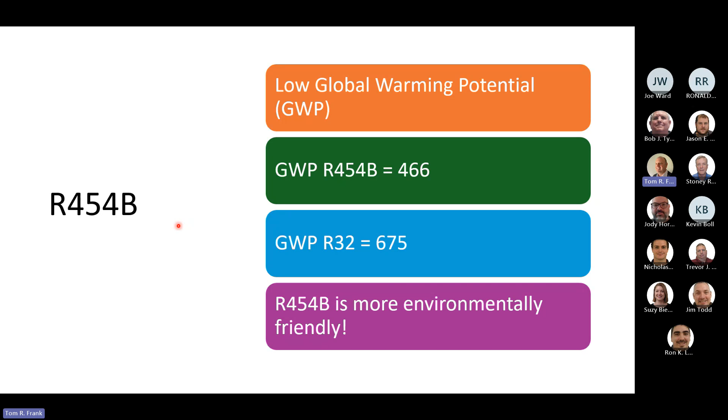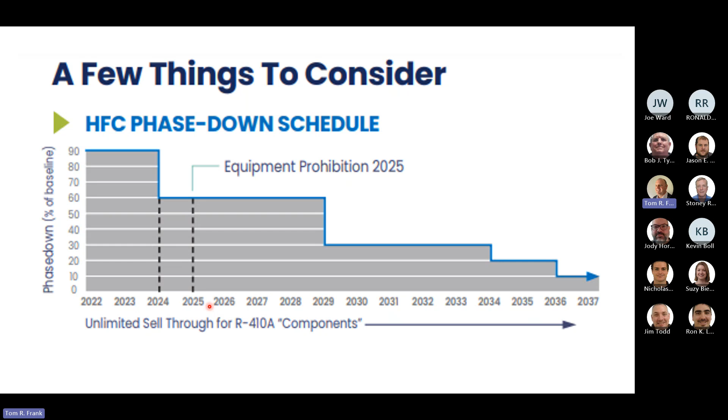We'll talk about the sell-through periods here, but long and short of it is the refrigerant itself, 410A, will be available long into the future, but manufacturers have to stop making stuff that uses it and move to lower GWP refrigerants moving forward.

Sell-through, which is different than in the past and important to understand. If you were to chunk up the products that we sell today into 3 different categories, one is as a product, meaning it's completely sealed, delivered from the factory, assembled. Best way to think of that would be residential package units, commercial rooftops, window air conditioners, refrigerators.

Those products actually have a 3-year sell-through period, meaning, once this year is over, 2024, if you can find them in the marketplace and they're available through distribution, you can install those types of products with 410A for 3 years.

A system, which is very common in our marketplace, you could think of as a system that is built of components, an outdoor unit, coil, air handler. You're assembling it in the field, if you will. There is only a 1-year sell-through after this year.

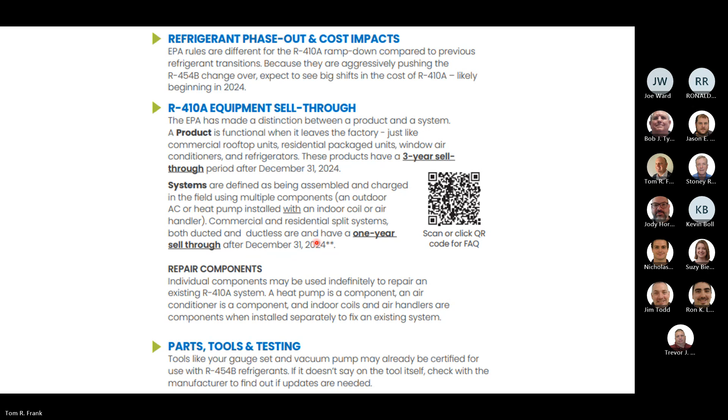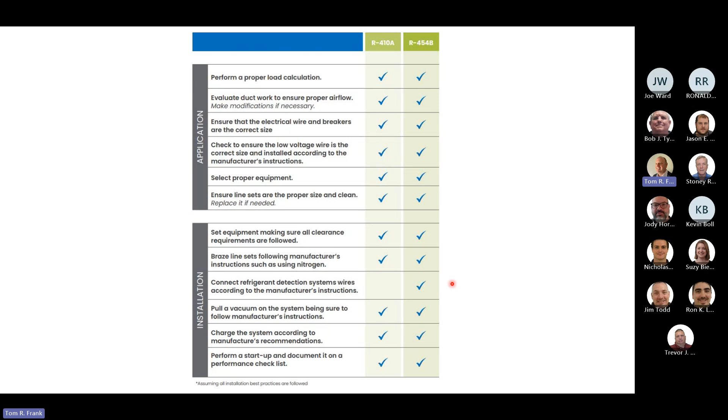Pressures, temperatures, glides are all very similar. The installation time to install one versus another isn't really any different. Brazing really isn't any different. In fact, you might start moving to refrigerant press moving forward. But nothing really different there, nothing to be wildly afraid of.

So with all the manufacturers, you're going to hear lots of different terms. We're calling this a refrigerant detector sensor or a control. These are the devices that actually sense if a leak should ever occur in the system and how the system should act afterwards.

Allied has taken an approach to transition to these new refrigerants by having some product that may come shipped as 410A, but is actually field convertible to R454B. And to do that, you might need some extra accessories initially until the product becomes completely dedicated to these new refrigerants later down the timeline.

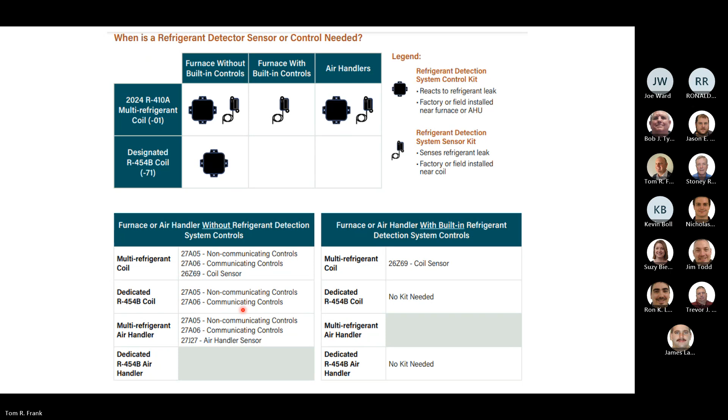We placed our last order for 410A quite some time ago, back in June, if I remember correctly. But they started shipping these multi-refrigerant coils back in May. Air handlers started to ship back in June. These sensors and controls, we've already taken some inventory of. We actually have some inventory now of 13 and 14 SEER2 air conditioners in the new refrigerant. We're starting to order some of these new ones, and then you can see we're really right on that cusp of things getting very interesting very quick.

Later down the timeline, you'll see the furnaces. Not a major change there other than the control board. You'll still have the same models. We'll go over that transition there.

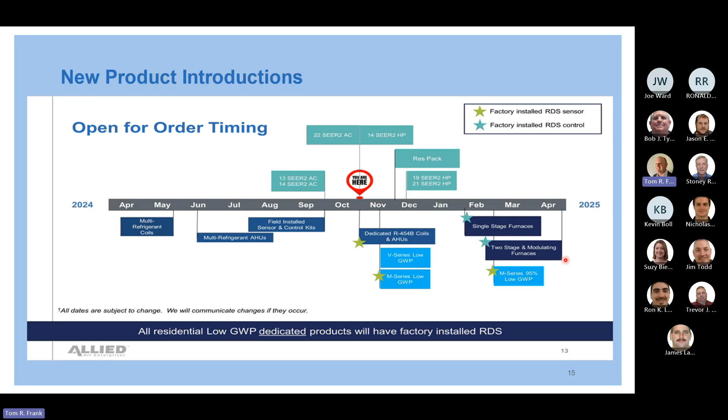Know that internally here at APR, we have some great resources for our teammates to understand old models to new models. There are product roadmaps available through the manufacturer. This actually helps us to keep an eye on and a layer of accountability within the company, that we're acting as one team to basically make sure that we have adequate.

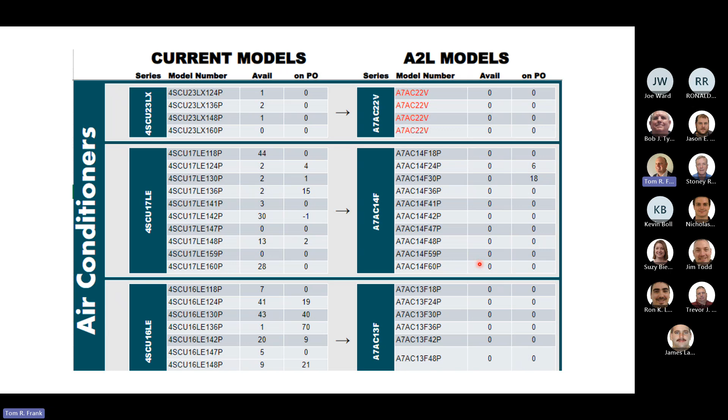So stocking strategy, last orders for 410A were already placed. The goal was basically to have enough product to get us past the timeline that we were just looking at of transition for each product, plus a buffer, about 6 weeks. Maybe a little bit more than that. But if you've been working with a manufacturer for any length of time, I most certainly have, you know that sometimes you got to take the timeline that they tell you and add a solid month or two or maybe a quarter onto that. They're holding very close to their timeline, which is good, but we put about a 6-week buffer on there.

Our flagship brands, AirEase and Armstrong, our goal is really to not delay that transition. Of course, we have to be very careful about how much excess 410A we bring in so we don't get stuck with it. So our goal there is really to transition to 454 as it becomes available.

Concord, which is our value line of Allied products, the goal there is really to not just transition there, but actually to have extra inventory, be last distributor standing, if you will, in air conditioners and heat pumps, entry level, and their match components. Our goal is to have enough to hopefully get us in those products to June of 2025. So, if you're a contractor and you're hanging on to it for dear life, you just do not want to transition to the new refrigerants, we should have adequate supply of Concord brand equipment to get us really till what we think is June. It could change, but I think we got that planned out pretty good.

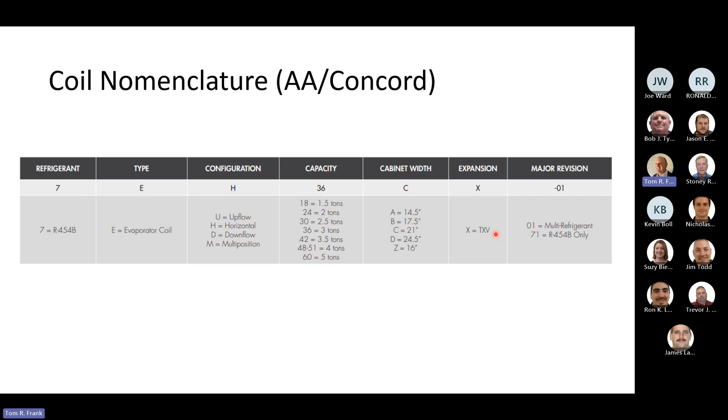But 7 is the indicator in the Allied world that the unit is at least shipped for or compatible with 454B. You will see in the coils upflow, horizontal, downflow, multi-position, various tonnages, widths, and then really everything moving forward is an expansion valve. So if you were hoping and keeping your fingers crossed that pistons would somehow stay in the world of HVAC, think again, it is really moving all to TXV at this point.

This is a picture of our product roadmap, which is available as a PDF from Allied. Happy to get anyone copies that they would like, that shows the old coils to the new. Takeaways here, really looking at this, is everything that existed before will exist in the future. There's not an incredible amount of change here. The two ones that are just worth pointing out might be the horizontal coils are going to be factory installed TXV, where they were field installed in the past.

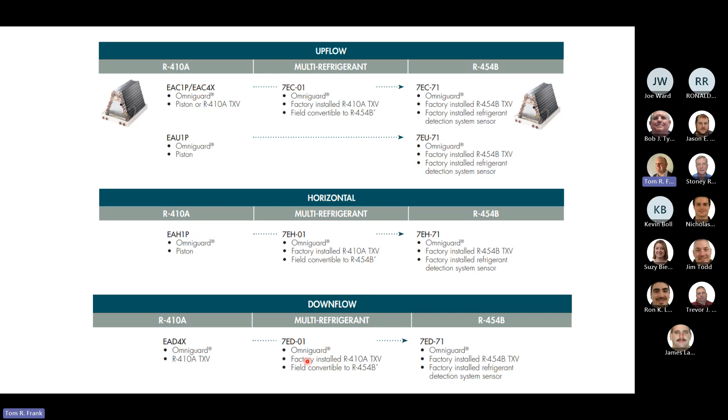Okay, and you can see here this -01 to -71, that's the currently shipping flex coils, if you will, and then eventually they will become dedicated to 454B and downflow coils as well. Multi-position coil, you're probably wondering, is that in the future? There hasn't been any major announcement to that, but I suspect that is a product we will see again.

Air handlers, nomenclature review here, starts with a 7. Same story there, 454B. You will see some -01s versus -71s. Electric furnaces will still be available. We do have some air handlers that are 2-piece in design. If you're not familiar with that, they used to be the BCE 7 series, but they will now be the 7AH2s, and that 1 versus a 2 is 2-piece versus single-piece.

Good product. They will be available in PSC, constant torque ECM, and variable speed ECM. Nice option, still having PSC available. Not every manufacturer does that. Some have gone exclusively to ECMs. And then we've got our capacities, voltages, TXVs as standard. And then most will be 24 volt, but some that we sell more than I knew. I was told that after the last presentation.

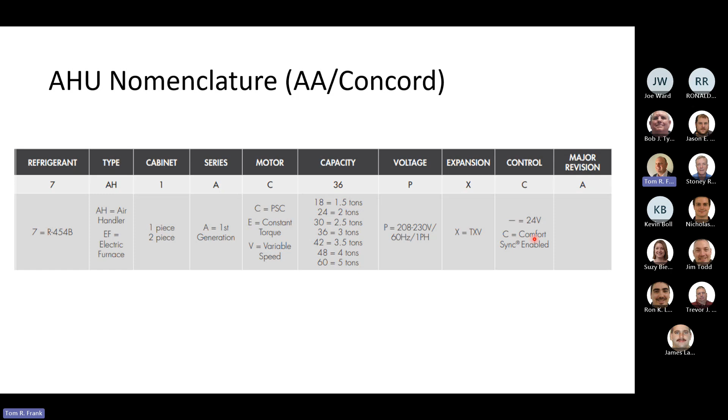But we do have some that are what they call Comfort Sync enabled, and they're very good, usually on the higher efficiency systems. They are compatible with the A2 or A3 communicating control. So if you are somebody that likes the idea of a communicating system, plug and play, we do have some air handlers that are Comfort Sync enabled. They can be 24 volt, but they have the ability to be part of a communicating system.

If we're looking at the air handler roadmap, here's a very simple snapshot. Here are all the BCE 5 series that are a very strong part of the product family. You can see the bridge here, if you will, with the -01s. We're currently stocking, selling these, inventorying them. And then as time marches forward, they will be dedicated 454B models with the control already factory installed and the sensor already factory installed. Okay, for now, if you are really itching to install a new 454B product, you would need the kits to make that happen and a TXV.

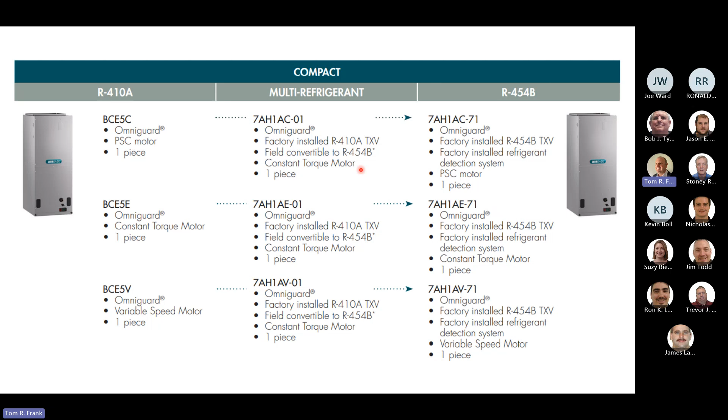Just quickly here, this slide's not correct. It does say constant torque motor on this C model. That's just a typo. It's still available as PSC. These are the two-piece models that you would know as the BCE 7s. Don't confuse that 7 with 454B. That's old nomenclature. But you would see the new models here as you go forward. One is available as a bridge in the constant torque ECM. The communicating capable unit here will only be available as the current BCE 7S or as the new 7AH2 model. That's a typo there too. This will be an AV. Disregard that.

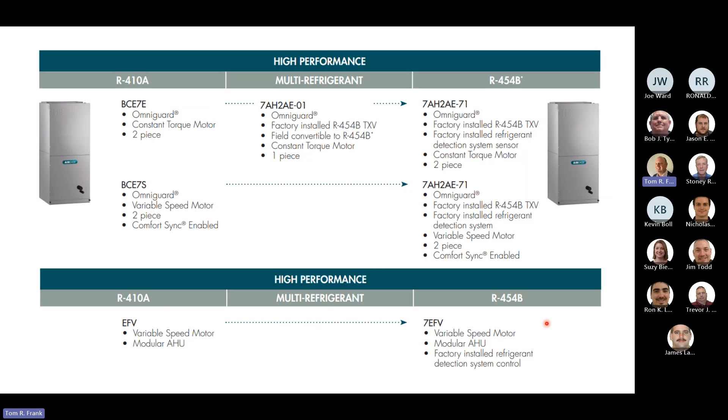And then the electric furnace or the modular air handler. There's a picture of it. You can think of that as the top section of an air handler. We do stock that. That's nice for attic installations where space is an issue. They come in various widths, just like the coils. Good to know that will continue to exist in the family. Not on this slide, but are the apartment style air handlers, the BWCs. They will also transition to the new refrigerants.

Outdoor units, air conditioner and heat pump nomenclature. If you are a flagship brand, you will see the A here for AirEase. You will see the 7 for the change in refrigerant, air conditioner versus heat pump. We will have some product that is cold climate heat pump capable, which is nice and is a factor when you get into certain markets and utility rebates, tax credits, things like that. A true solid, strong performing heat pump, which will be a welcome addition to the family.

You will see change in nomenclature. The old nomenclature, which is confusing for many, 16, 17, 18, 22, that all really was geared around what efficiency could you get up to. And the feedback from the contractors as they went through this change was that people felt like they were being sold equipment that was above the minimum efficiencies many times. So love it or hate that strategy. The new strategy will be base level stuff. The nomenclature will reflect the minimum efficiency, and then the higher end product, like the inverters, will have more of an up to strategy in that nomenclature.

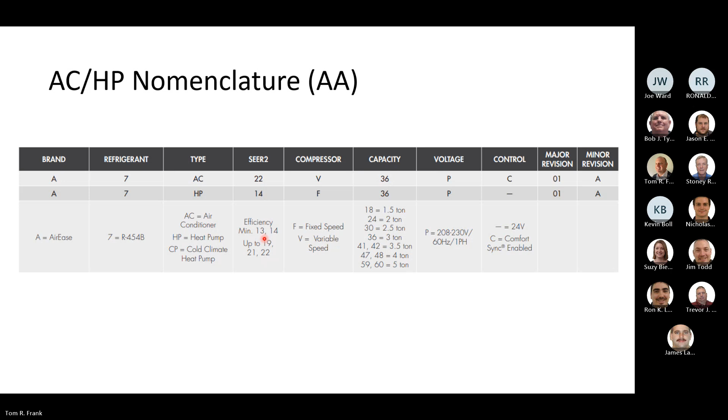This is the product roadmap, just to kind of take a peek. This is looking at 410A versus 454B. This is AirEase flagship brand. The 23 SEER will be a 22 in the new refrigerant, very similar type of a product. The 18 that we know as the Lynx in the Concord world, but as the 18 in the AirEase world, will be available as a 19 SEER, little upgrade in efficiency.

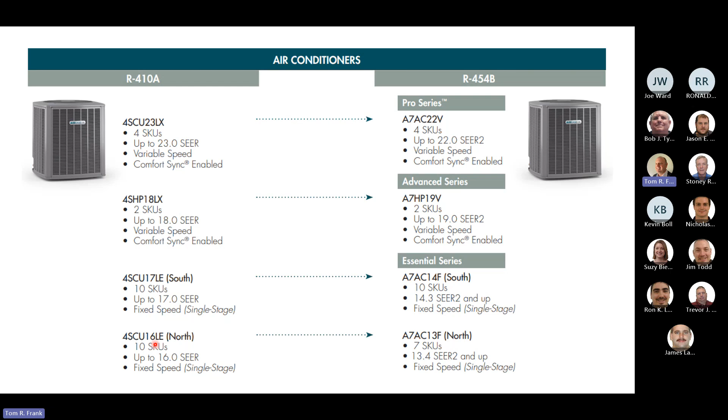The 17, which is our minimum threshold in the South or Delaware for us and Maryland, will now be the A7 AC14. So you can see that change there, going from a 17 to a 14. And then the 16, which is the minimum efficiency in the North, will now go to a 13.

Heat pumps, very similar. You know, if it existed before, it exists now. This is where you'll see the upgrade to the new modulating heat pump that will actually be cold climate capable. Some differences in the cabinet, which we'll show here in a few minutes. Some really nice upgrades actually to that cabinet. But if you saw it before, you'll see it again.

And here's where you'll see that entry level series or essential series, they're calling it, where you see the nomenclature change to that minimum threshold of 14 here. Don't worry, nothing really changed. You can just see the strategy. This was up to 17 SEER versus 14.3 SEER2 and up. So just getting with the new times, the new SEER2 ratings, getting modern.

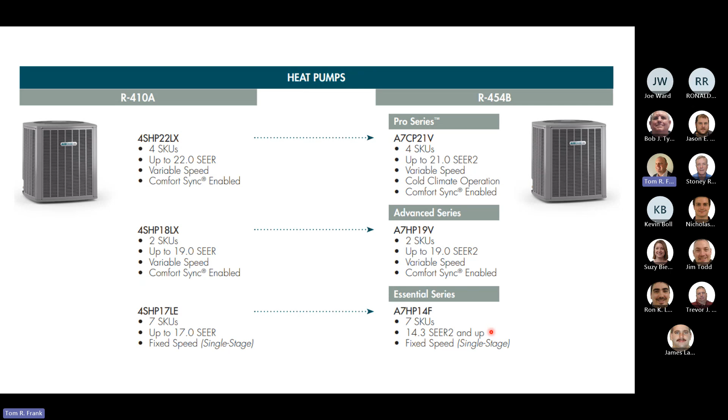Concord, very, very similar, which is the value line. The air handlers that we went over, just so you're aware, if you didn't know this before, the air handlers are actually the same nomenclature, whether they are AirEase or Concord. So they're the same SKU, same strategy, nothing changed there.

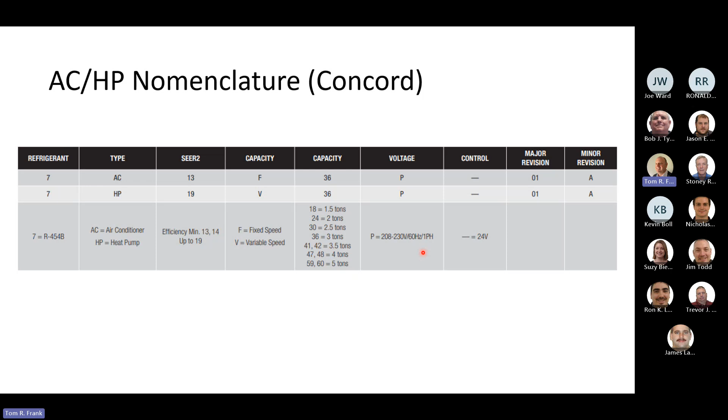The Concord outdoor models, here you go again, you got the 7, that's a 454B, AC versus heat pump, minimum efficiencies versus up to efficiencies, fixed speed, single stage, and then we've got, of course, a very nice offering of variable speed product, even in Concord. The tonnages and controls. Really everything in the Concord world is 24V, no communicating offerings there. Skinnier lineup than AirEase, but you get the idea here.

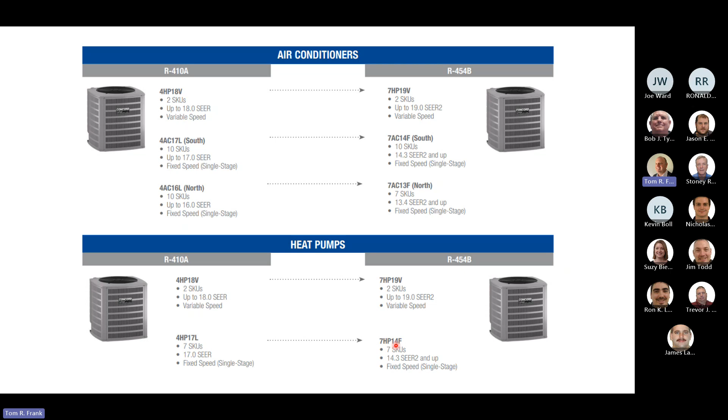You've got modulating product. This is actually a heat pump, but they do list it in the air conditioner family as well. You get the heat for free, that's what I tell people. And then you've got your single stage product air conditioners, the 17s to the 14s, the 16s to the 13s. And then on the heat pumps, you'll see the change over there, just model nomenclature change. No major new additions, just model number upgrades and refrigerant upgrades.

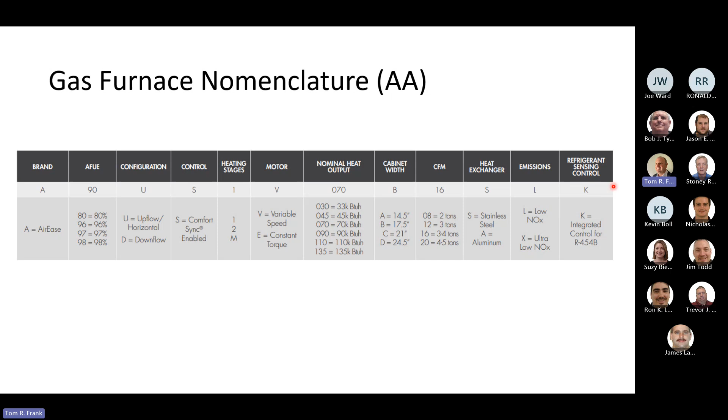Gas furnaces, don't need to dwell on this too much. There's really not any major change. The major takeaway here on the nomenclature is that the new models, as they become available in 2025, will have a K at the end. And that just means that that control, or the ability for the sensor to integrate into the furnace control, will already be built into that furnace.

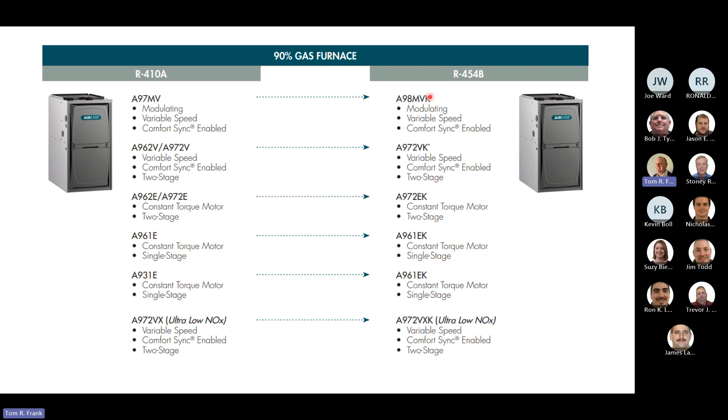No major changes, no major surprises there. A really, really strong furnace offering. With AirEase, the only thing you see here is the K. That's the major change there. Same thing for the 80%ers.

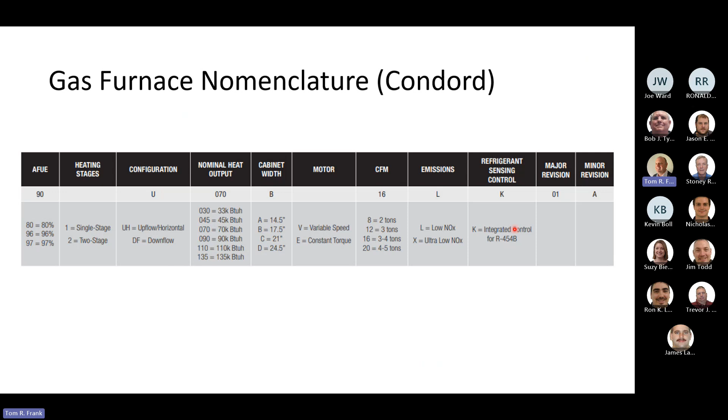Concord, I spelled it wrong, Concord. It's Concord. Same thing there. There'll be a K at the end as those become available. Don't sweat that yet. That's really a 2025 thing. Again, still great product offerings here in Concord.

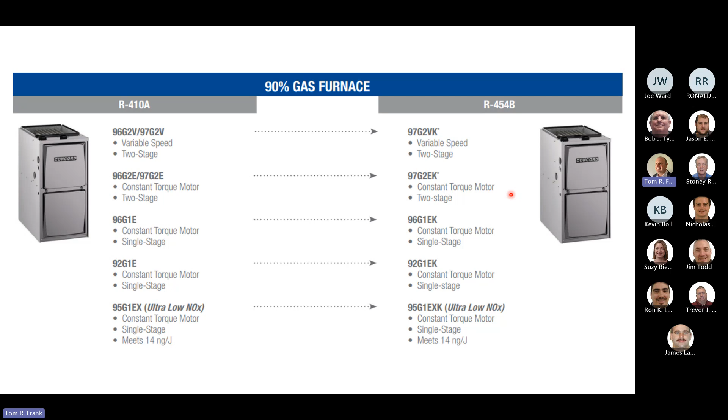We have probably more tax credit qualifying furnaces than any other brands in the marketplace. We've got the modulatings, of course, 98% in the AirEase, 2 different 97%ers in the AirEase. We've got 2 different 97%ers in the Concord. Very strong, great product going into the heating season. Good to know. It's a $600 federal tax credit, and there are quite a few utility rebates that would add onto that as well.

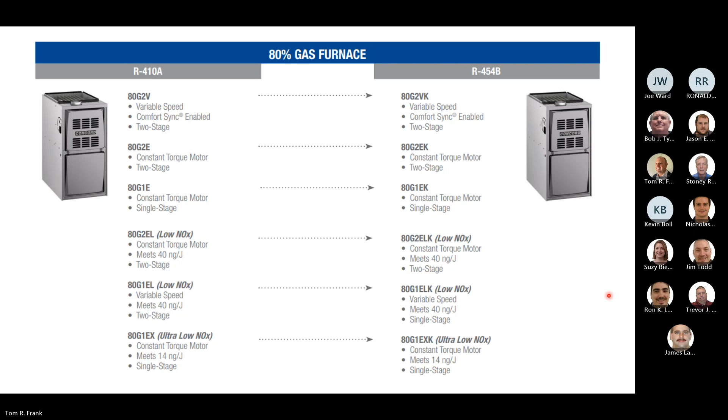And the good news with that is most of these electric heat packs today, not only can they be used in the new air handlers and they'll fit in just fine, but they can also be used backwards. They are backwards compatible. The only exception to that is going to be the electric heat kit for what we knew as the BCE 7S. That is the communicating capable variable speed 2-piece air handler. That one is very specific. That's the only one that is a little tricky, where the 7S requires that old heat kit, and the new variable speed communicating capable air handler, not even available yet, will require its own separate electric heat pack.

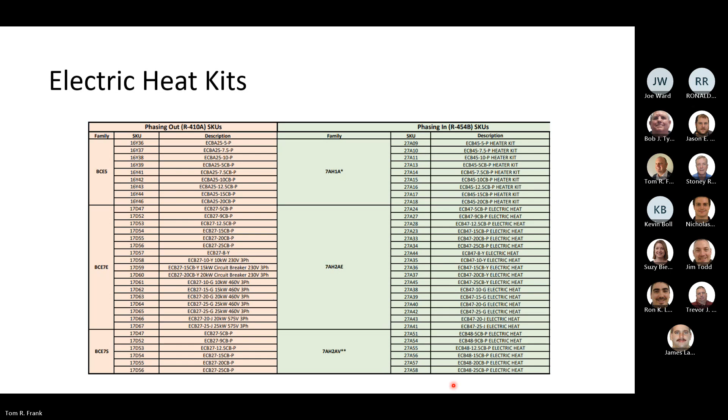So takeaways quickly on the electric heats are the ECB 45s, those are the new ones. They are backwards compatible with the old BCE 5. So they will work in the new 7AH1s. They will work in the old BCE 5s. Very simple. The ECB 47s are now backwards compatible with the old BCE 7Es. So another one with backwards compatibility. The only one that's really tricky is that BCE 7S and that new communicating capable. They require specific kits, so be careful.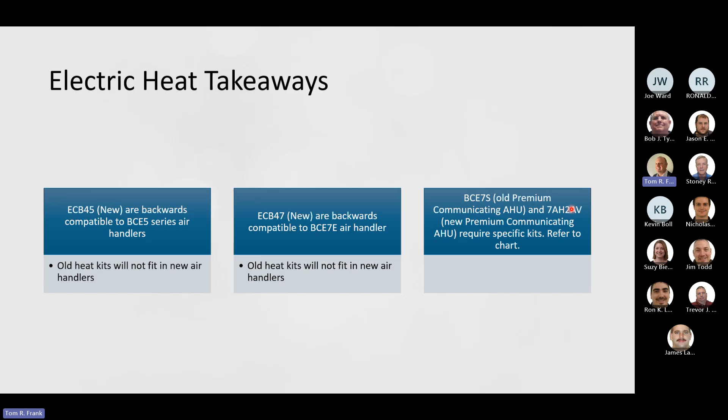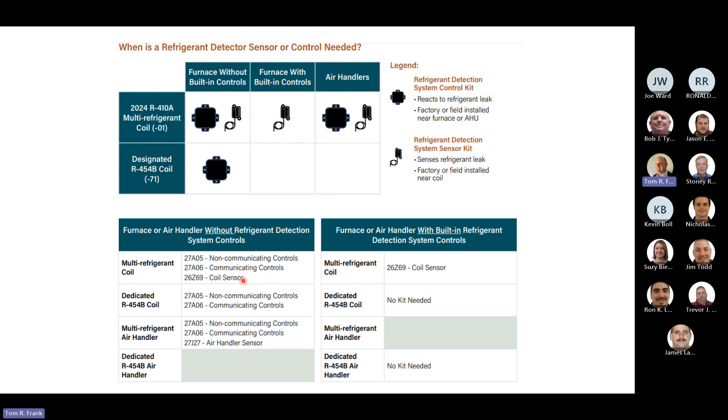I already showed this slide just as an introduction. I'm just bringing it up again just to hammer that home, that as we begin to bridge into these new refrigerants with the Allied brand of products, there are times when you are going to need a sensor and a control, sometimes just a sensor, sometimes maybe just a control. We will do our very best internally to make sure that you get the required components that you need. But this is just for education purposes. This chart is available, and we will use this chart religiously, I'm sure, as we get more into that.

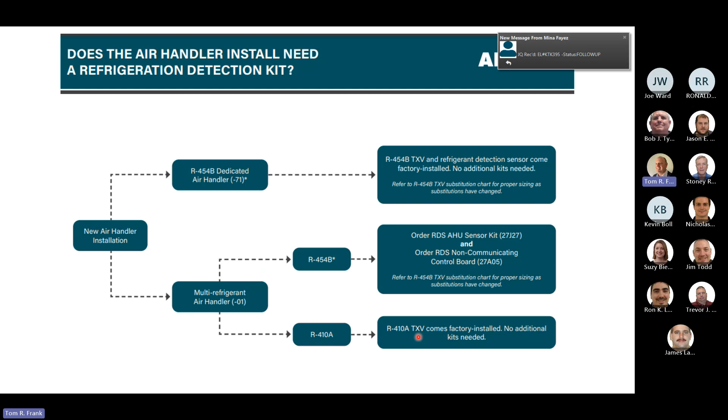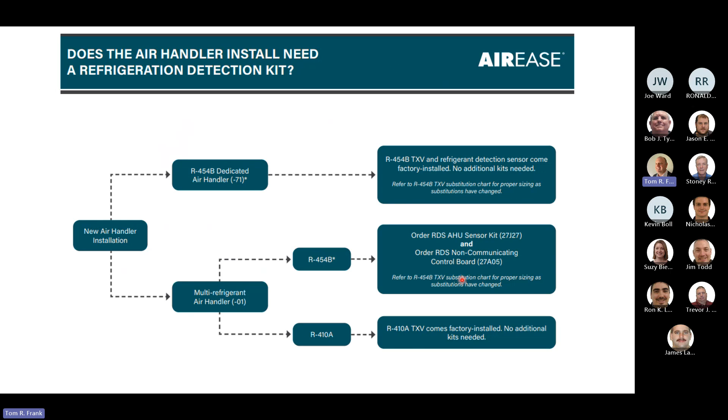This is a tree, again, probably more of an internal thing that will help us to understand, hey, I've got a new air handler installation. Well, how are you using it? Is it a dedicated 454B air handler application, or is it a multi-refrigerant air handler? And how am I going to apply it, with 454B or with 410A? And okay, you don't need to do anything. You're good for 410A. Well, I want to make it 454B. Okay, you're going to need this kit, you're going to need this board, and you're going to need some sort of TXV depending on your application.

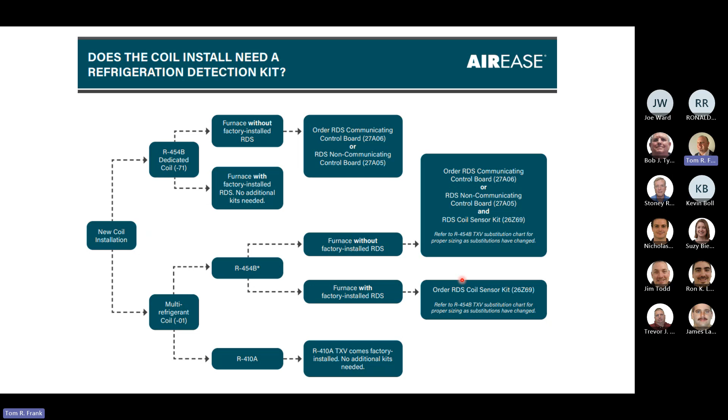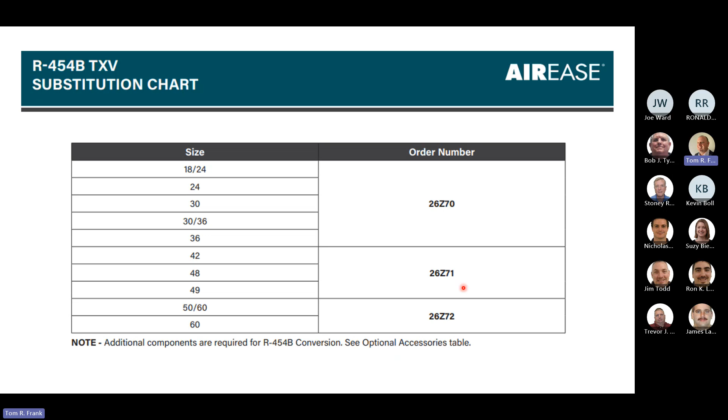Same thing with the coil. Bit of an eye chart, and it might look confusing, and I won't lie, it's a little confusing, but we got this. TXV kits are fairly simple. There will really be 3 different TXVs depending on the tonnage that we'll supply for 454B applications when we are shipping the -01 coils or air handlers.

This is a real world example that I thought would be worth looking at, giving you actual model nomenclature. If I were to sell a new 454B condensing unit, which I do have in stock right now, and somebody wants to go ahead and move to that new refrigerant, God bless them. We have a coil that's in stock today with the -01. It is the flex coil. It can be for 410A or 454B. It does come factory shipped for 410A.

I am going to need to give our customer the field kit, which is the control board, this 27A05, specifically for this application with a furnace. And I am going to give them the coil sensor conversion kit. We'll show you where that gets located, but that'll get located in that coil right down here in the bottom corner, I think, on a bracket. And then last, we would need the TXV kit as well. There's a picture of what that looks like. Bolt on, nothing crazy. Take the old one off, keep it in your truck stock maybe, and put the new one on.

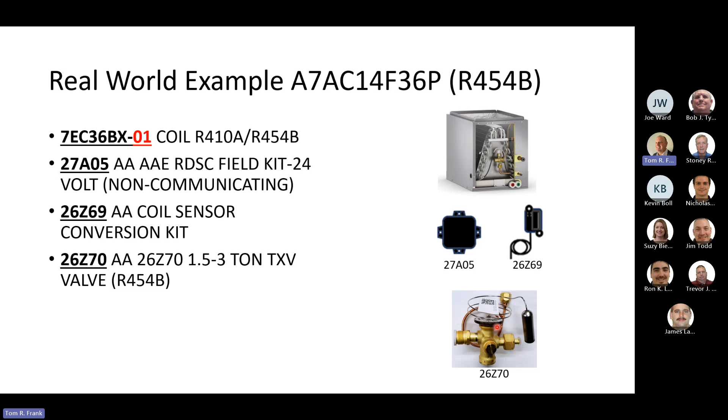So you might be wondering, what happens if there's a leak? The simple answer to that question is the system will turn off. The blower will turn on to circulate and dilute the concentration of that refrigerant leak. Once the system has determined that it has reached below the threshold of acceptability, it will allow the system to run again.

That control board will have some lights on it that will tell you whether it's running normally; it's flashing green to say it's turning on. Blue would be an indicator that the system, even though maybe it has passed, went through mitigation. If it was flashing blue, mitigation meaning it sensed a leak, it shut it off, it ran the fan, and then it brought it back on again. So you come back on a service call or maintenance visit and you see that control has a blue light on it, you know that it went through a mitigation.

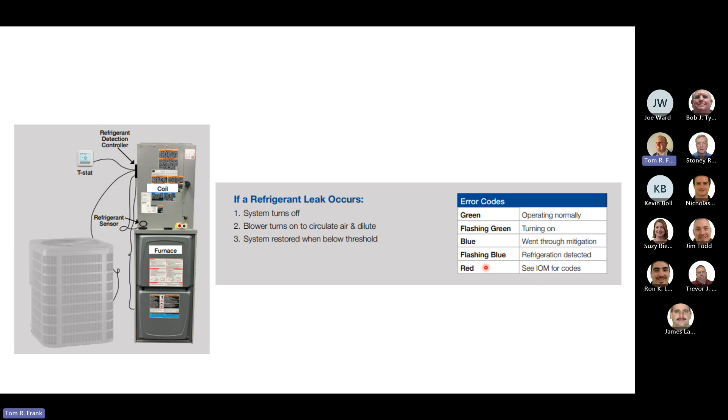Now, was that just something silly at startup and there was some refrigerant floating around in there somehow and it picked it up? Possibly. Red would be an indicator of some sort of specific fault, probably a control board problem. Replace a control board.

People were asking me all the time, why are the coils so big? In fact, with the new refrigerant change, the coils really are the same dimensions.

But I'll use it as a time to insert a joke here to break up the monotony. The reason why the coils are so big is because they're running out of room for all the stickers. So this is a case of a coil that was converted to 454B. The reality of it is the coils are not any bigger than they were. But this is just an example of what that would look like by the time you get done putting all the stickers on there. There's no more coil, it's all stickers. So get ready for that.

This shows boots, which will be something that you'll see in the future that will come with product when you convert it. The intention of the boot is to cover up where you may be doing your braze or press connections so that if you had a leak, it would funnel that refrigerant back into the coil cabinet. Kind of a neat thing. This is just a close-up picture of what that sensor looks like.

This is a picture of what the board looks like. Here's all your landing terminals for your thermostat and your condenser. This here is where you would plug your sensor into. There is a second sensor capability. Some local municipalities, it's hard to know yet, might require that you install a second sensor to detect refrigerant in the mechanical room. There are provisions there for that just in case. And then the indoor unit terminals there as well.

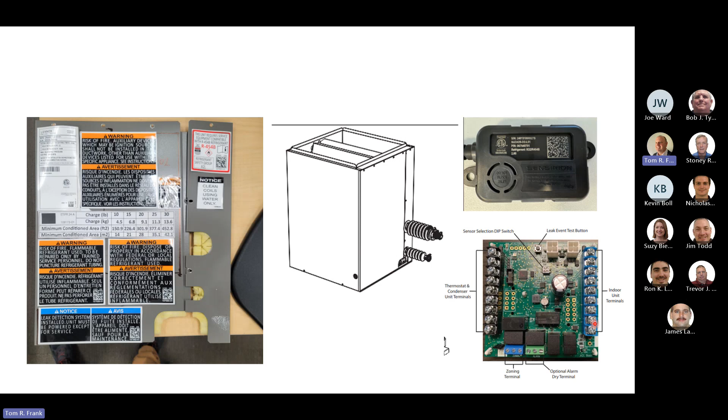Just a quick plug and a reminder, as we move into those new equipment and new models, Allied does have a really wonderful communicated control. It's really kind of the window into the system. It is really in the AirEase world only, not Concord. Sorry, Concord people. But it is a wonderful user interface.

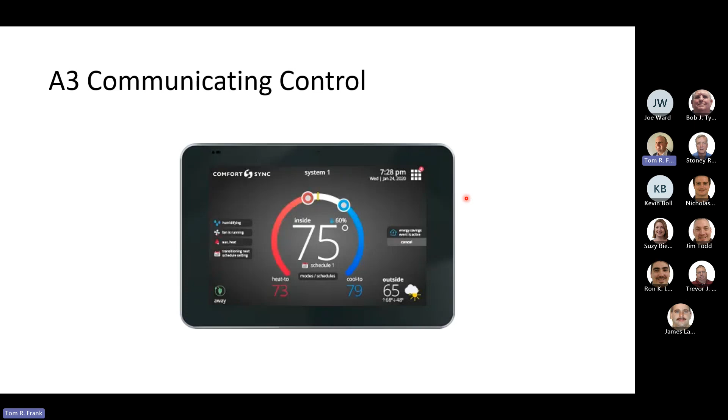There are a lot of capabilities of this control. Wi-Fi is built in, plug and play capability, advanced troubleshooting, just a lot of really neat things is available and will continue to be available. Probably one of the best ones on the market, in my opinion, but not for everybody.

Some other changes that you're going to see in the product lineup, just a couple of pictures here that are neat. You're going to see longer stub outs for press connections. So if you're somebody that's already doing this, you'll know that sometimes you're cutting that bell end off and you are close, man. You are real close to that valve. And, I don't know about you, but I'd be crazy nervous.

So you're going to have longer stub outs on the new equipment. That will make it easier to cut off the bell end. And if you so choose, go ahead and press away. Despite the change in nomenclature, ratings are still very strong. I've looked at a lot of those combinations here recently, and there's going to be some still nice ability to hit rebates, local rebates, and tax credits, 25C.

Pro Series, some changes on some of those condensers. While none of these units have been officially released yet, you can expect, I know at least the cold climate heat pump, when that becomes available, it's going to have a composite top and a composite base. A very, very nice looking unit, a wonderful upgrade to the high-end products there. Again, that high-end heat pump is going to be cold climate rated.

You will see, I don't have a picture of it, I just learned this from a factory tour not too long ago, that the variable speed blower modules have historically always been mounted on the end of the motor. In the future, as the new furnace models get rolled out, you're going to see that module be located closer to where the control board is. So that'll make it a little bit easier for service access if you ever had to change it out. Really a pretty cool transition there.

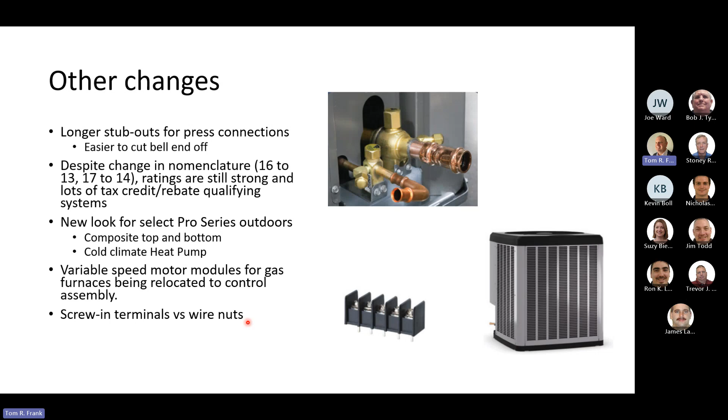And then screw-in terminals versus wire nuts, it's mostly the air handlers. You'll see some changes there. All good changes. Moving on to MagicPak, which is a product of the Allied families. Just a few slides really on this. What's changing? When you look at it, there's not really at face value a lot of major changes. There will be options for mitigation controls, but not necessarily required.

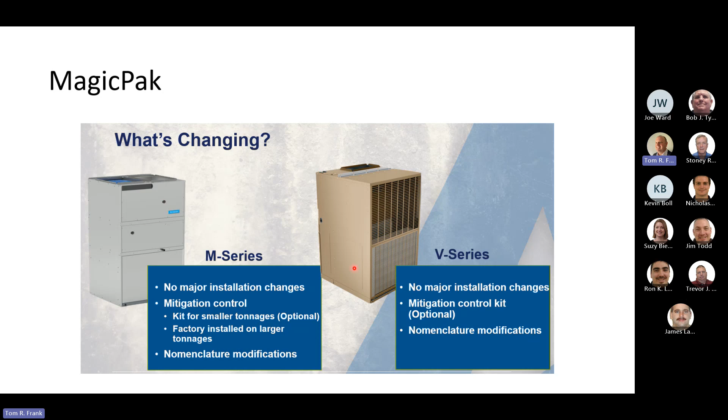You need that mitigation control, that RDS, when you have, I believe it's more than 4.1 pounds of refrigerant in the system. And ductless systems, small package units like these MagicPak, don't have that. They many times have less than that. So they are not required to have that mitigation control, which is great. Some res pack units might be the same way.

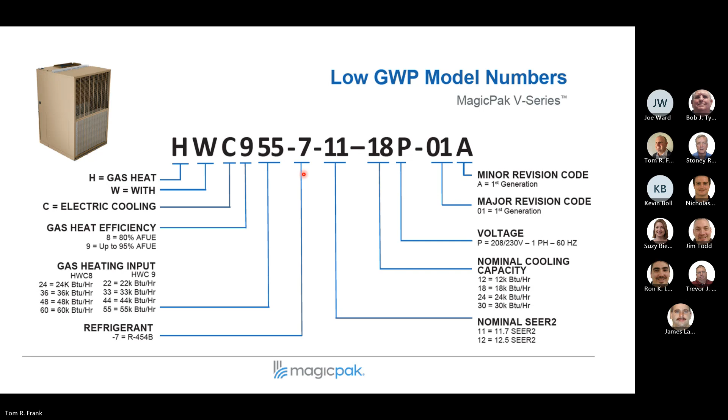If you're looking at the nomenclature, it'll be very similar to what you may know and love already, with the exception of the 7. So that magic number 7, lucky number 7, you can play the numbers tonight. That will reflect the change in refrigerant. This is the M series, which is probably the newer of the two series of MagicPak systems. Again, nothing major there, but you will see that 7.

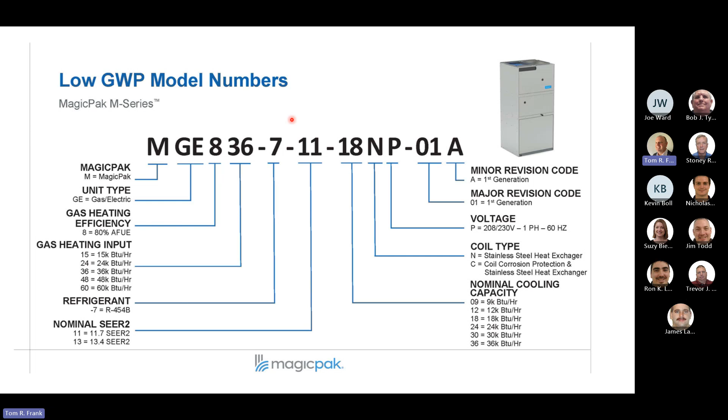When you think of a 410A system, which is comprised of outdoor units, coils, things like that, there is really only a 1-year sell-through. Ducted, ductless, everything there that requires you to build that system in the field only has a 1-year sell-through after this year.

But products that are signed, sealed, and delivered from the factory already put together have a 3-year sell-through, should you be able to find them in the marketplace. Again, manufacturers have to stop making stuff that uses it at the end of this year.

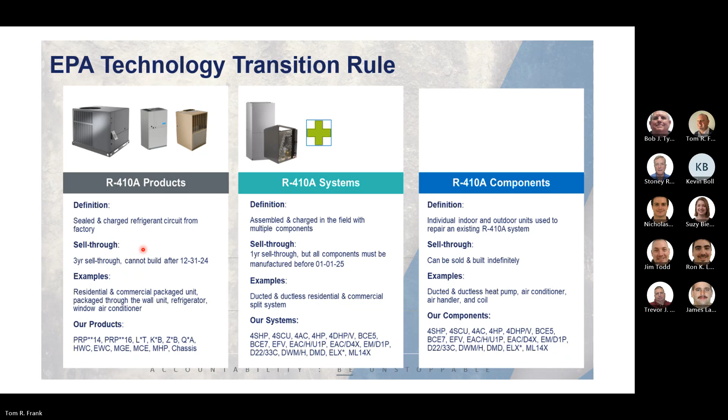I think I already addressed that, but in the case of a Magic Pack, just for what it's worth, which are really a product, that's a 3-year sell-through, but also know that chassis may still be available, and since they are a sealed refrigerant circuit, as long as you can find them and the manufacturer has them in stock, you could continue to sell them for 3 years if you can find them.

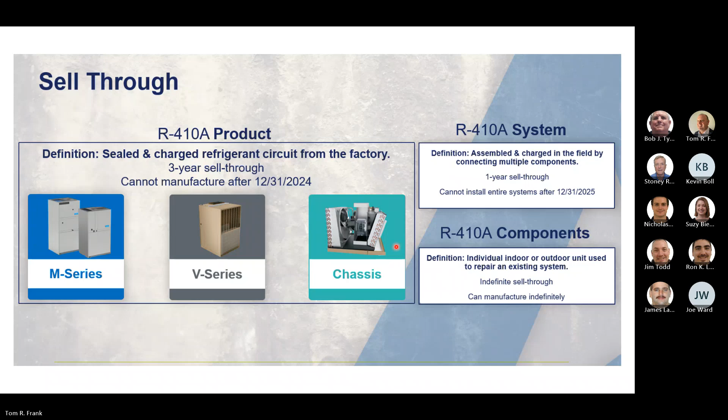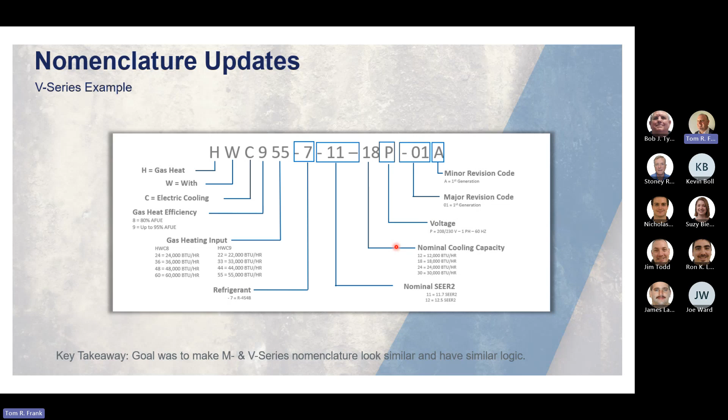Nomenclature, again, with the 7 and a Magic Pack, this is a gas pack unit. Also a gas pack unit, higher efficiency, 90 plus. Nice to know that we have that. That's also a 7 in the nomenclature. Timeline of Magic Pack, this has really kind of already happened, and they're starting to manufacture these new refrigerant products really as we speak.

This slide here is just to let you know, not really a lot of communication out there on this yet. This is a very recent thing. This is about the 25C tax credit, which affects most of the residential equipment that we sell in our marketplace. The summary of this slide here is those standards are changing. A brief description of what those standards look like is that the SEER2s and EER2s have been elevated. If you remember the Tax 25C, it's the highest tier of CEE without it being the advanced tier.

So in this case, we're going from 16 SEER2, 12 EER2, which was the current standard, very hard to get to, and it's going up by another SEER2 point. Gas furnaces remain unchanged. Heat pumps in our market are changing from north and south to path A and path B. I'm reluctant to really describe what that looks like because I don't really have a complete understanding of it myself yet, but you can see the difference just like north and south.

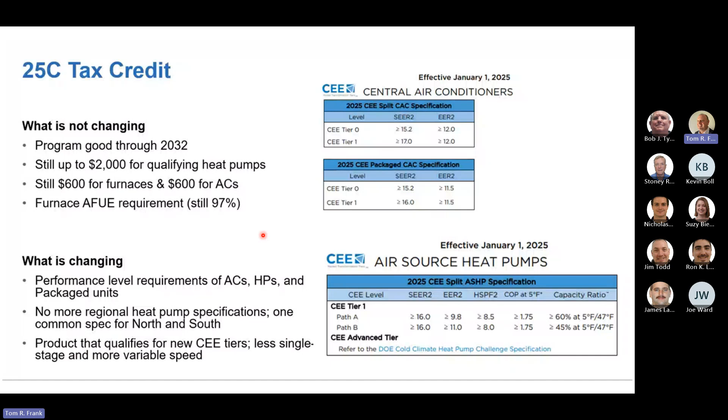So that brings me to the end of my presentation. We are actually early. I think at this time, Suzy, I don't know if you can open it up for questions or not. Are there any questions out there from anybody, either in the chat or that's feeling brave enough to unmute themselves? Yeah, we don't have any in the chat. So if anyone wants to unmute themselves and jump in, you are welcome to.

I have a quick product question as far as inventory. There's a helicopter in the background. That's nice. Concord 10 kW electric heat kits. The last month or two, it seems like we've been scraping bottom trying to find inventory on those. And I don't know if there's a new part number, like if the new heat kit is available and I need to be using those. Is that something you know of offhand?

Yeah, I don't know who's talking there, whether it's an APR person or a customer, because of the screen that I have. But let me see if I can stop sharing here. I'm an installer, HVAC. Okay.

It is possible that somebody is just not looking at the correct electric heat kit number and the substitute. If you were ordering online, as an example, and you were ordering the old part number, you would need to know what that new part number is. And it should list online ordering. I don't know if the substitute pops up. Internally in our own system, it should pop up as a substitute for sure.